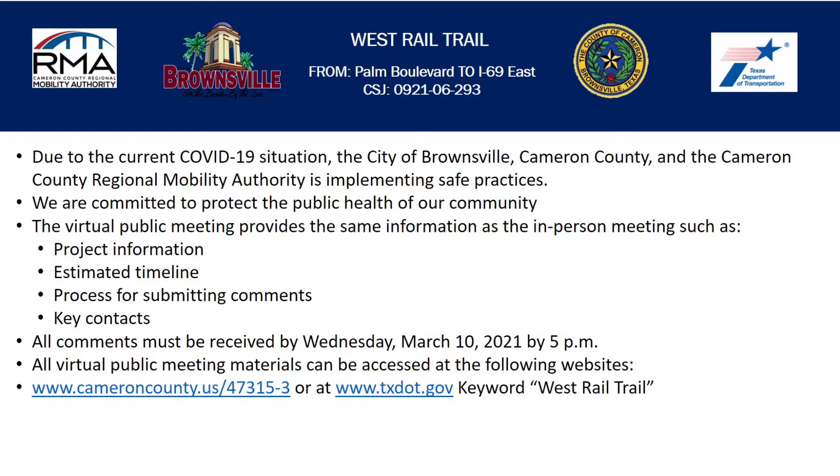The purpose of the virtual public meeting is to encourage and maintain effective communication with the public about the project. In addition, we will present and describe the recommended project alternative. This virtual public meeting follows an important step in the environmental process by providing an opportunity to the public to provide their valuable input in the proposed project. Public involvement is an ongoing aspect of the project development process that encourages and solicits public input and provides the opportunity for the public to become fully informed and engaged in the project.

During the next few minutes, I will be covering the following: provide an overview of the West Rail Trail project. We will describe the purpose and need of the project, show the project schematic that has been developed for the project, and highlight major changes within each section of the project. We will provide a project schedule and then explain the virtual public meeting comment process, which is different from an in-person public meeting. The virtual public meeting will then adjourn the presentation portion. Even though the presentation will finish, the public comment period will remain open until March 10th, 2021 to enable the public to provide comments to the project team.

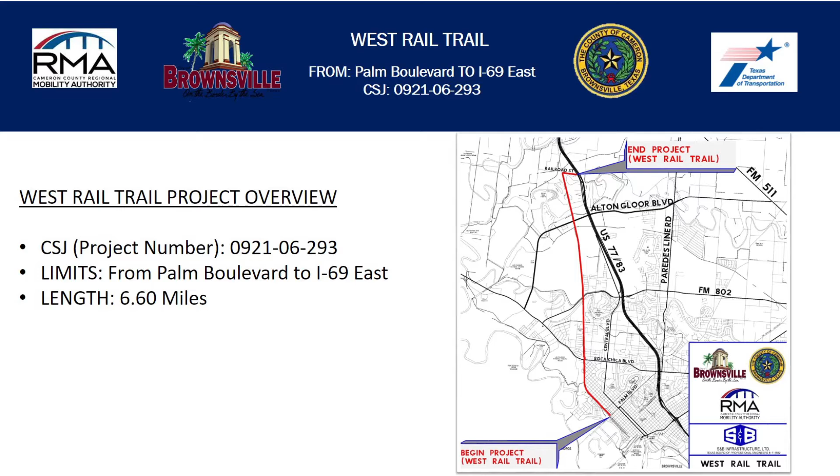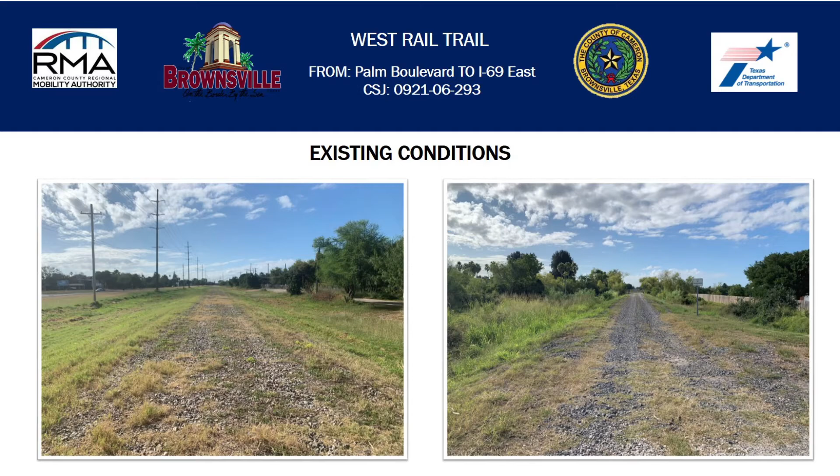The West Rail Trail consists of a 100-foot wide old railroad corridor that consists of only the rock foundation and ranges from 25 to 30 feet in width. All other railroad infrastructure has been removed. Vegetated grass drainage ditches that run parallel on both sides of the rock foundation provide drainage for the old railroad. The existing right-of-way is 100-foot wide through the majority of the length of the project. Pictures presented depict the existing conditions of the old railroad corridor.

The proposed improvements would include a 12-foot wide dual-purpose hike and bike trail. This also includes the construction of 2 new bridge structures to span drainage features found within the limits of the project. The image on the right side of the slide reflects the typical section for the trail that includes the 12-foot shared use path, with a 5-foot buffer on each side within the usual 100-foot wide right-of-way. Lighting is being proposed throughout the length of the project.

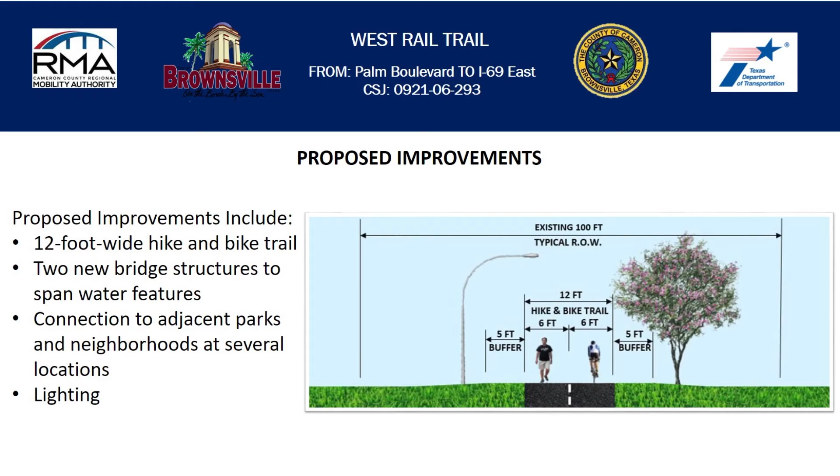For this presentation, the following slides will depict the dual-purpose hike and bike proposed schematic layout in sections due to the length of the proposed project. The schematic will also be posted on the virtual public meeting website so the public can view the schematic better and they can zoom into areas of interest.

This slide consists of the sections from the start of the project at Palm Boulevard Northeast to West 3rd Street. As shown on the schematic in the beginning of the project, the dual hike and bike trail will be constructed within the old railroad right-of-way along the existing rock foundation. In addition, access to the dual-purpose hike and bike trail would be provided for the residents that live within the D Street area located west of the proposed project. No additional right-of-way would be required for the project. Drainage for the trail would be provided by parallel vegetated, open, graded drainage ditches.

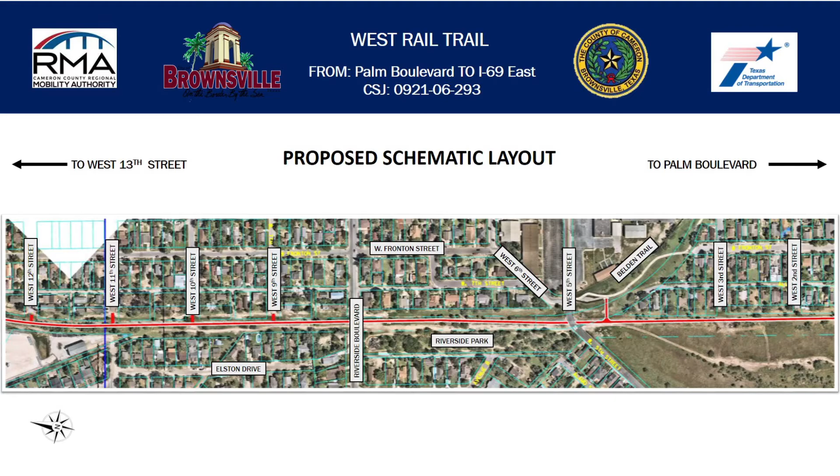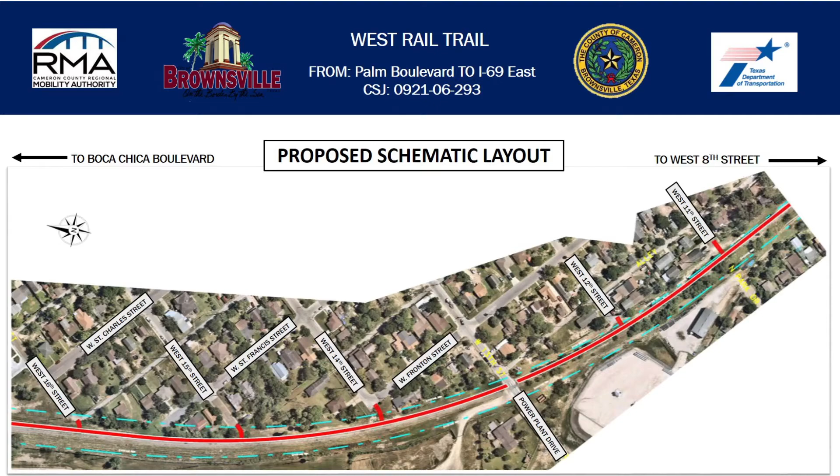The second section extends from 2nd Street northeast towards 12th Street. Connections would be provided at the Belden Trail, Riverside Park, at West 9th Street, 10th, 11th, and 12th Streets. The third schematic section extends from West 11th Street to West 16th Street. Within these limits, the dual hike and bike trail remains along the existing rock foundation within the existing right-of-way, and drainage would be provided by parallel vegetated open drainage ditches. Neighborhood connections are being proposed at West 11th, 12th, 14th, 15th, and 16th Streets.

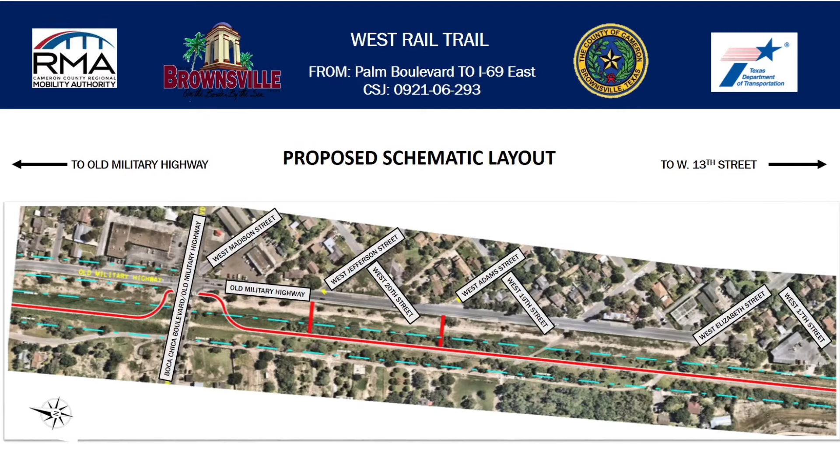The fifth schematic section extends from Old Military Highway to Holiday Lane. The dual-use trail would utilize the old rock foundation along the old railroad right-of-way and transition off the rock foundation at the intersection of Old Military Highway to cross at a 90-degree angle for a safe crossing. Once the trail crosses Old Military Highway, it would transition back to the existing rock foundation. Access to the trail would be provided by extending access to the Honeydale Mobile Home and RV Park and to Old Military Road.

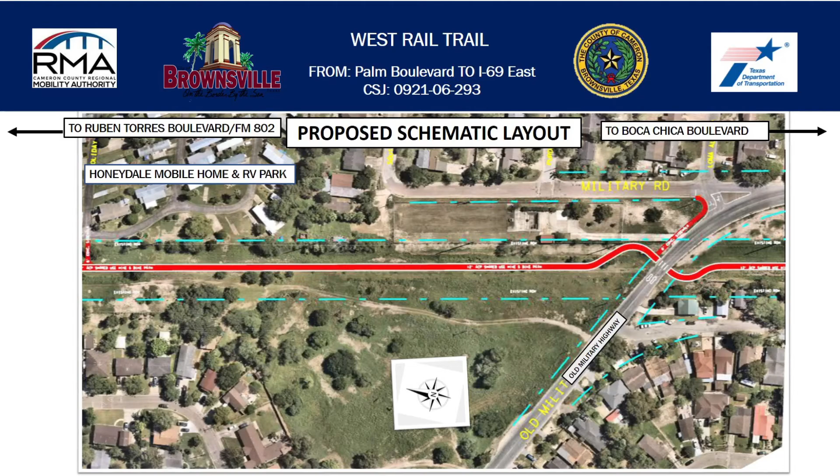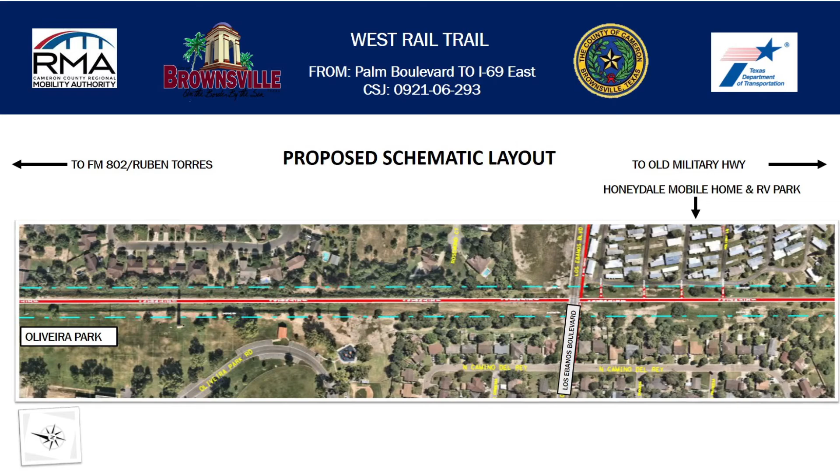The sixth schematic section extends from just south of Los Ebanos Boulevard north towards Oliveira Park. The dual-use hike and bike trail would traverse along the existing rock foundation within the existing right-of-way. Access to the trail would be provided by providing access points at Los Ebanos Boulevard and at 4 locations at Honeydale Mobile Home RV Park.

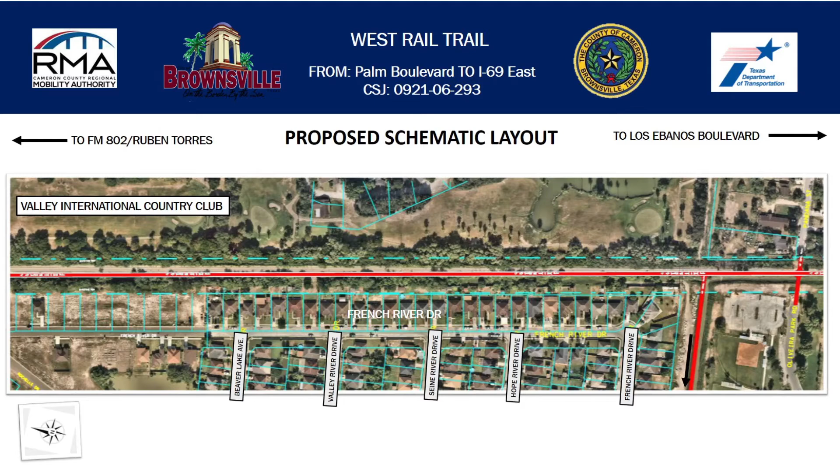The 7th schematic section extends from Oliveira Park Road to the Valley International Country Club. The dual-use trail would continue to traverse along the old railroad rock foundation within the existing right-of-way. Access to adjacent Oliveira Park and Rochelle Street would be provided for adjacent neighborhoods. The 8th schematic section would extend from the Valley International Country Club to Ruben Torres Boulevard, FM 802.

At the intersection of FM 802 Ruben Torres Boulevard, the trail would transition to the west right-of-way line to cross the intersection at a 90-degree angle. The proposed trail would provide an access point to the trail at Rochelle Drive and would utilize the existing bridge that spans Resaca del Rancho Viejo.

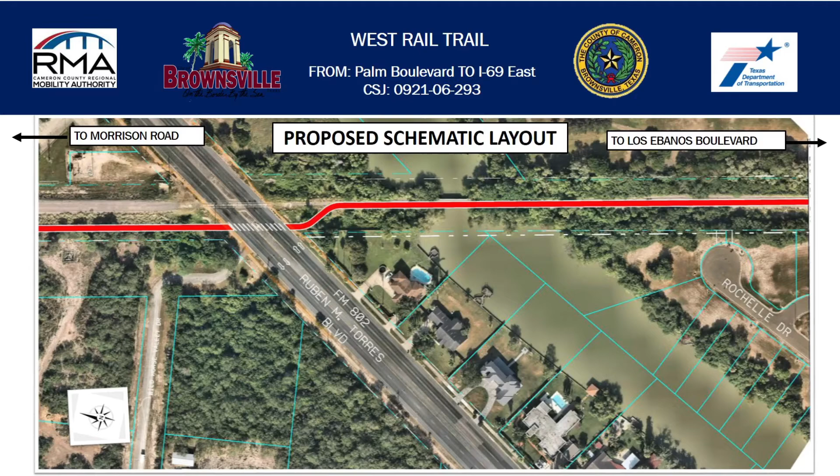The 9th schematic section would extend from FM 802 Ruben Torres Boulevard northwest towards Morrison Road. The dual-purpose trail would remain along the west boundary of Old Railroad right-of-way and provide access to adjacent neighborhoods at Marian Place, Tara Place, and Hacienda Lane. No additional right-of-way would be required for the proposed improvements.

The 10th schematic section would extend from Williams Avenue to Sedona Place. The dual-purpose trail would remain along the west side of the old railroad right-of-way and provide access to adjacent neighborhoods at Williams Avenue and Sedona Place.

The 11th schematic section would extend from Morrison Road to the Cameron County Drainage District Number 1, Ditch Number 1, and the Walmart Reservoir. The trail would remain along the west side of the corridor and would provide access to adjacent neighborhoods at Morrison Road and Madrid Avenue.

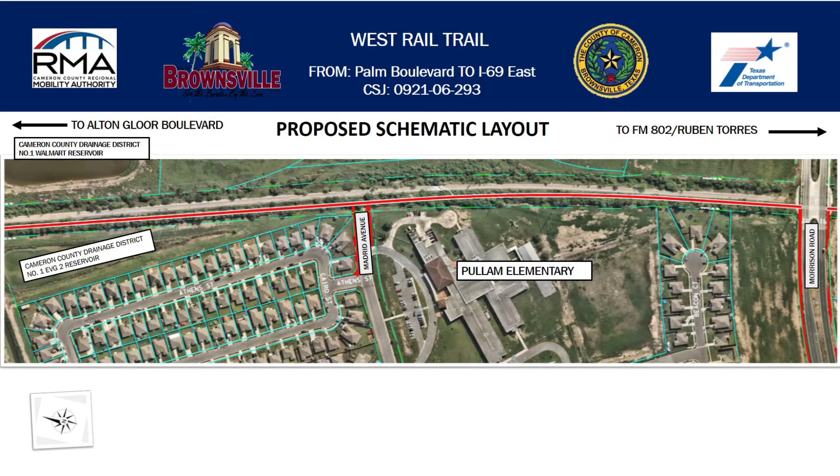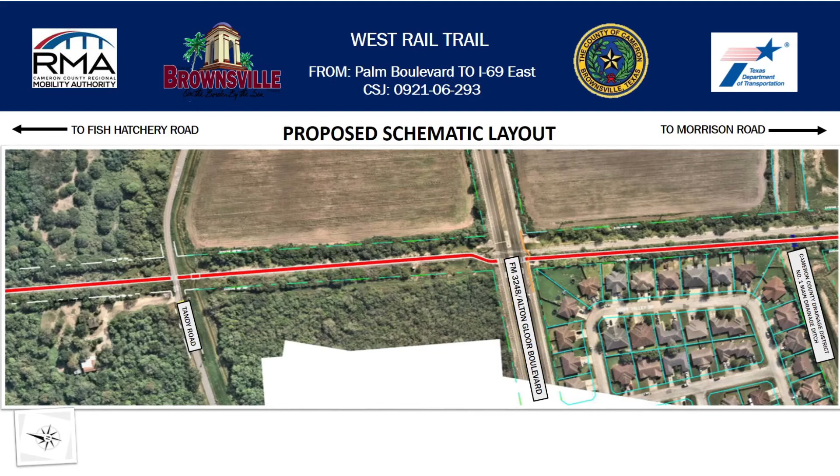The 12th schematic section extends from the Cameron County Drainage District Number 1, Main Drainage Ditch Number 1, to just past Tandy Road. At the FM 3248 intersection, the dual-purpose trail would traverse back to the rock foundation within the old railroad corridor. The drainage structure would be constructed at the drainage ditch located just south of Tandy Road. The proposed trail continues northbound along Alton Gloor Boulevard, providing a safe connection through the crosswalk. Then the proposed trail would cross East Tandy Road.

The 13th schematic section extends from Fish Hatchery Road to just south of 77 Flea Market. The trail would remain along the existing rock foundation within the existing right-of-way. A new structure would be constructed at a man-made drainage ditch just north of Resaca de la Palma.

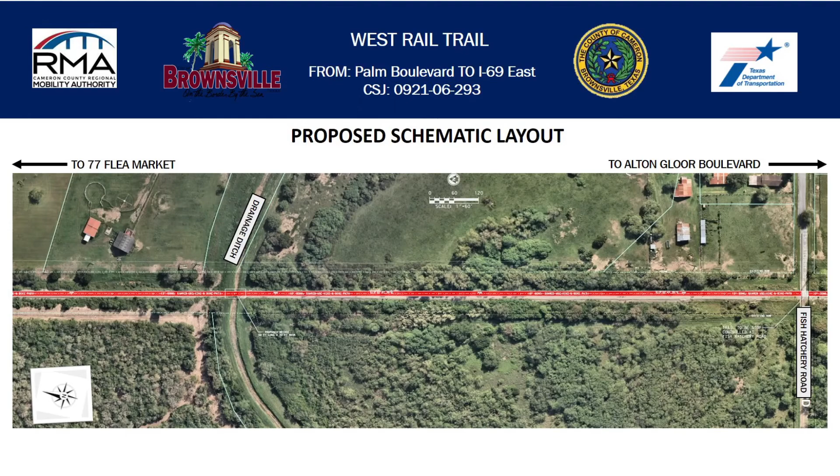The 14th schematic section extends from the old railroad corridor southeast towards I-69 East along the north side of the existing 60-foot right-of-way on Railroad Street and terminate at the southbound frontage road of I-69 East. The proposed typical section would remain the same and provide for a 12-foot wide dual-purpose trail.

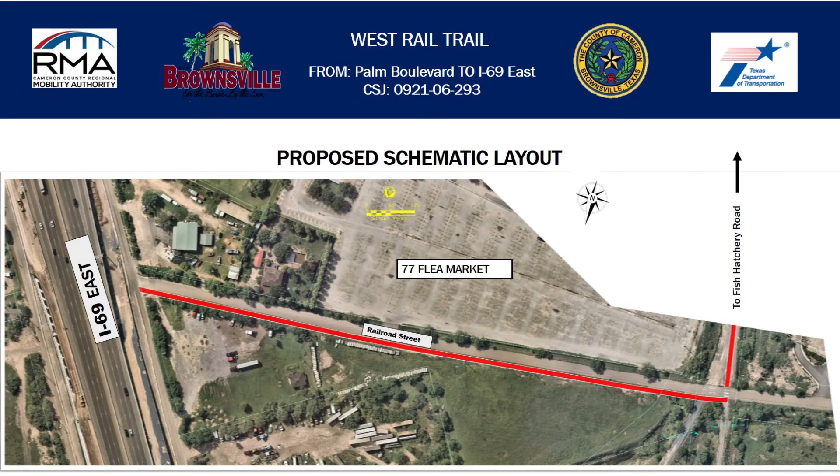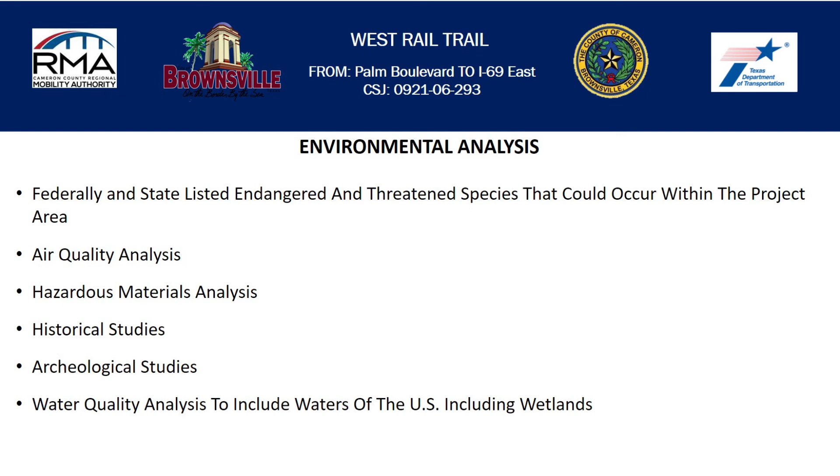An environmental analysis on the proposed project improvement is currently ongoing. This virtual public meeting is one important aspect of the environmental analysis process. In addition to the public meeting, an analysis on the project area's environment is being conducted. This includes the analysis of federal and state listed endangered species that could occur within the project study area, air quality analysis, hazardous material analysis, historical studies, archaeological studies, and water quality analysis that includes waters of the U.S., including wetlands.

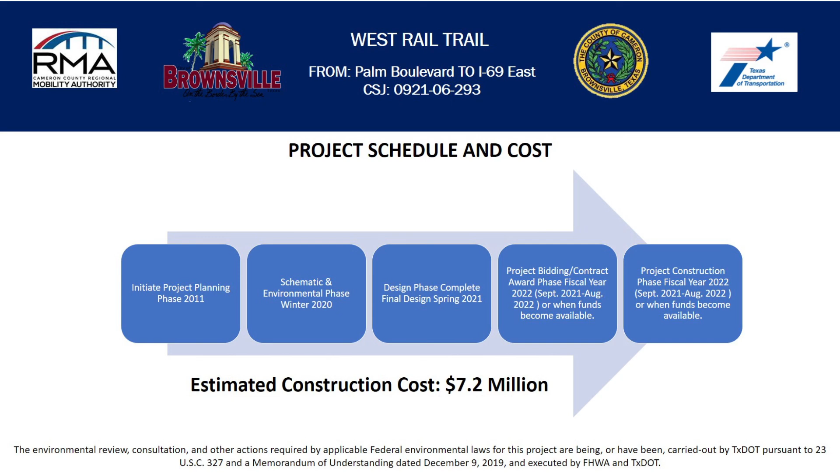The construction of this project is projected to be let within fiscal year 2022, which is anywhere from September 2021 through August 2022, or when funds become available. Once let, construction would take 12 months to complete. At this early stage, it is estimated that the construction cost is $7.2 million.

The purpose of this meeting is to gather public feedback. Please utilize the comment card on the website and submit the information either by mail, email, or phone. Responses to comments received by March 10th, 2021 will be published in the virtual public meeting report on the county's and TxDOT webpage.